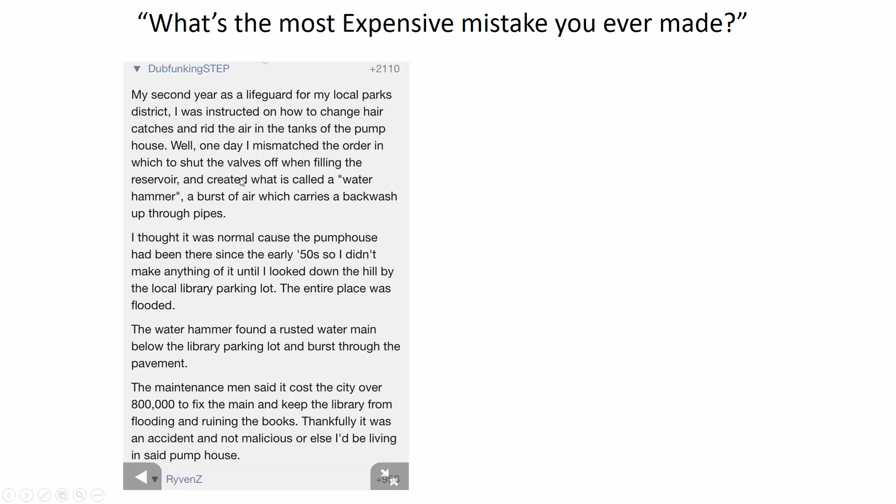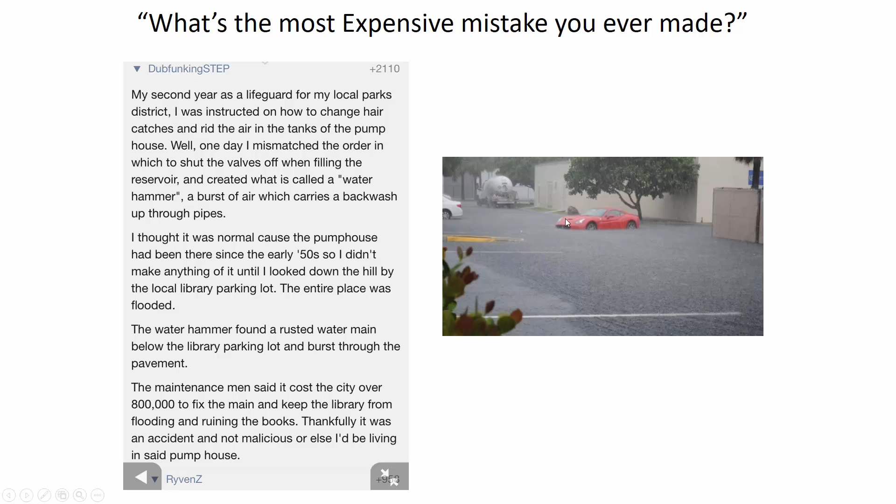$800,000 down the drain, right? $800,000 of damage. Now, I have an argument with their technical description of what water hammer is. It's not a burst of air, but it is something that can definitely find weak spots in a pipe. So we're going to be talking about what causes water hammer today, and some of the techniques we have for managing it. It's kind of just an interesting physics problem. And I don't remember why I put this picture of a Ferrari underwater — I guess to illustrate the cost of flooding.

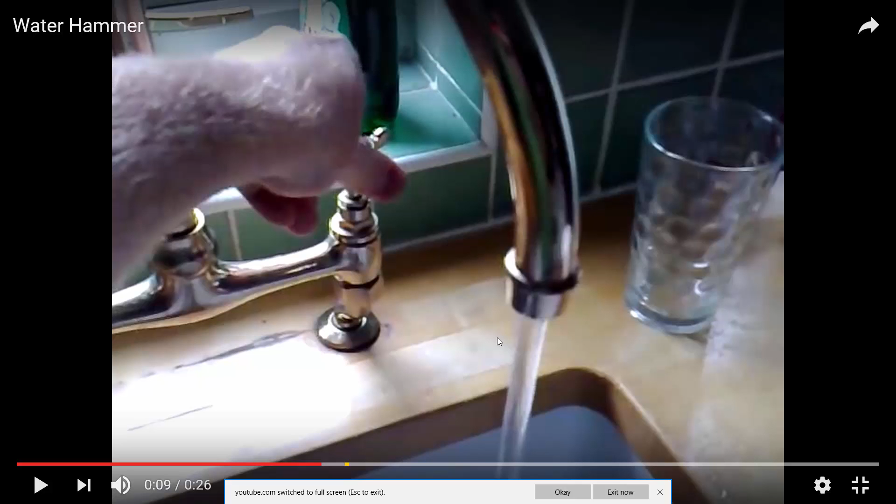So let's look at water hammer. This is a water hammer that somebody is observing at their house in the sink. It's kind of an interesting phenomenon because it affects both individual homeowners and also really complicated pipe networks as well.

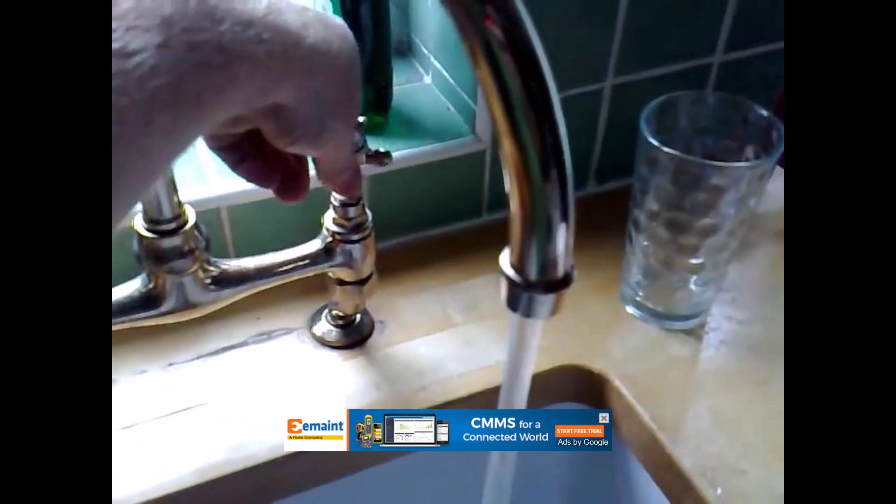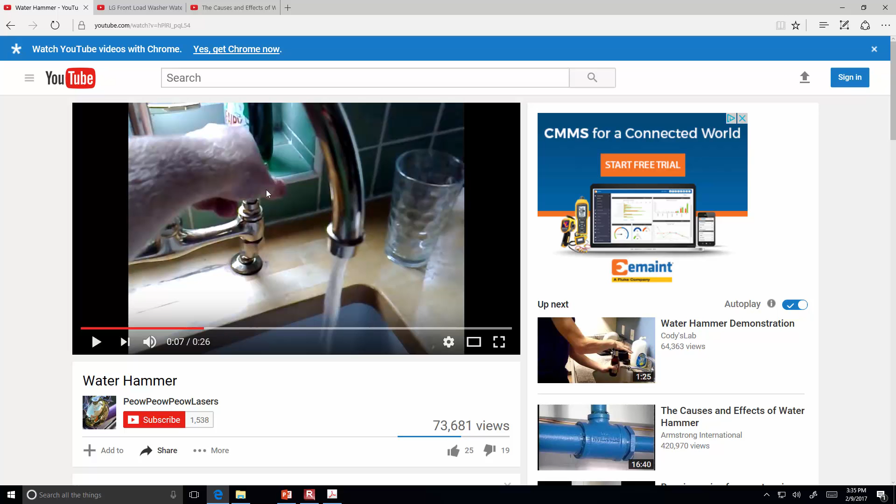Someone is adjusting the flow rate. So there aren't machine gun bullets inside the pipe somewhere. That banging back and forth is related to the time it takes for a pressure wave to travel from the valve that's being closed back to a tank. So that's one instance to illustrate water hammer.

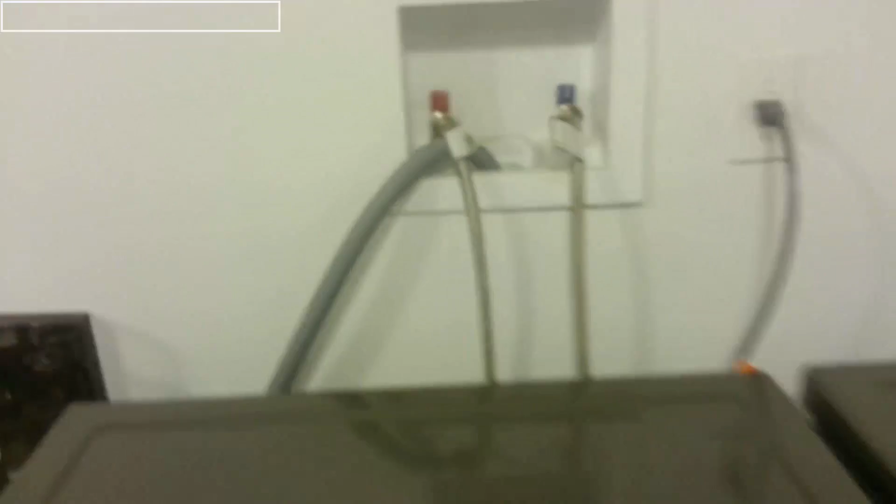Here's another. Somebody had the problem with their washing machine. You heard that noise come from the pipe. We're going to get closer, we're going to see the action over here. You see the whole pipe shake, that's from the cold water valve. And there's one solution to take care of this problem.

You actually have two. You either lower down your house water pressure, or you get yourself one of these called a mini water hammer arrestor. This is basically like a shock absorber. Having this in line would give some place for that shock wave to be absorbed so that it's not causing the surging in the cold water line that you saw.

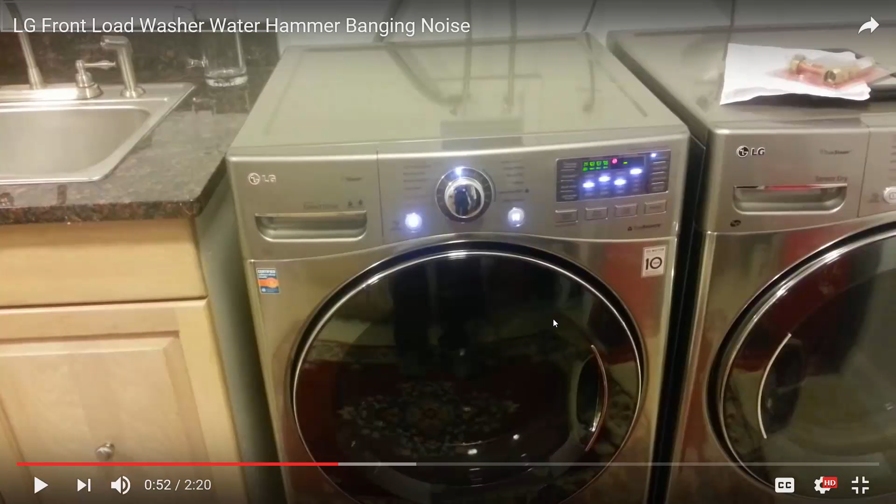The reason why that surging is happening in the pipe is that the valve inside the washing machine — it looks like an expensive washing machine, right? — is metering water into the basin in surges. It's probably an electronic switch opening and closing a valve very quickly to let just a few more drops of water come in. Machines like this are load sensing, adjusting how much water is added based on the amount of clothes it senses. It spins around for a moment and tries to calculate how much is there. It's really sophisticated, except for the fact that the valve is being instantaneously opened and closed. And that's what's causing the water hammer — the valve is being closed too quickly.

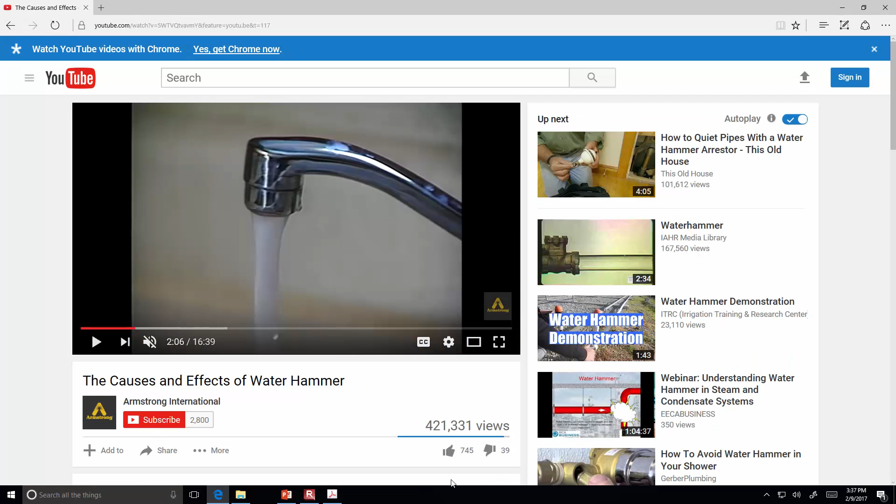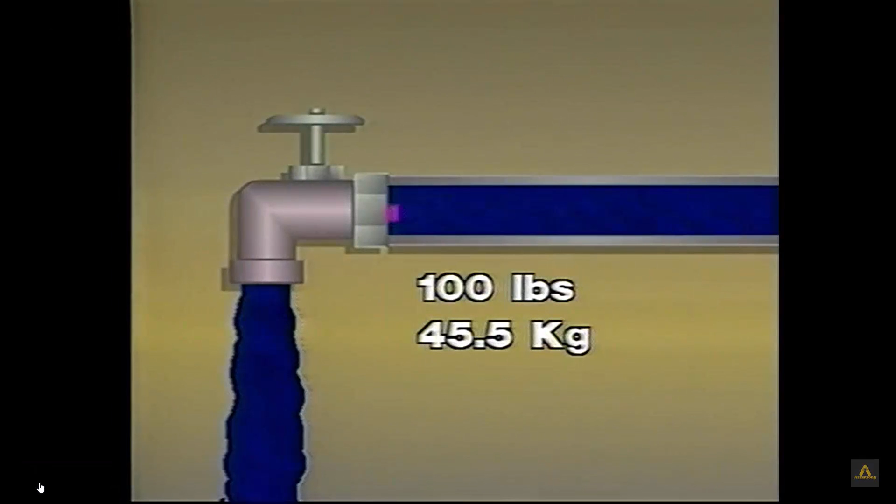This is a nice video that explains a little bit more about water hammer, so this will be the last one we watch. A column of water moves from its source at the main to the valve outlet. This could be 100 pounds of water flowing at 10 feet per second, or about 7 miles per hour.

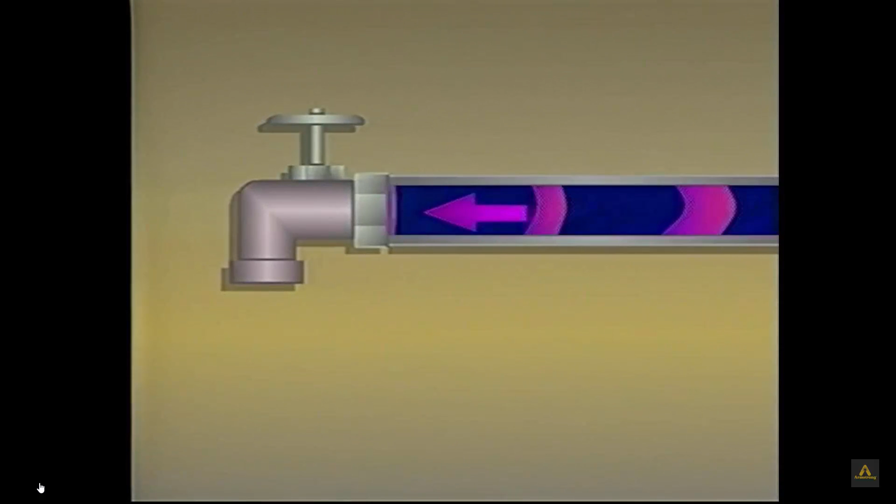Closing the valve suddenly is like trying to instantly stop a 100-pound hammer. A shock wave of about 600 psi slams into the valve and rebounds in all directions, expanding the piping and reflecting back and forth. So look at what caused that shock wave.

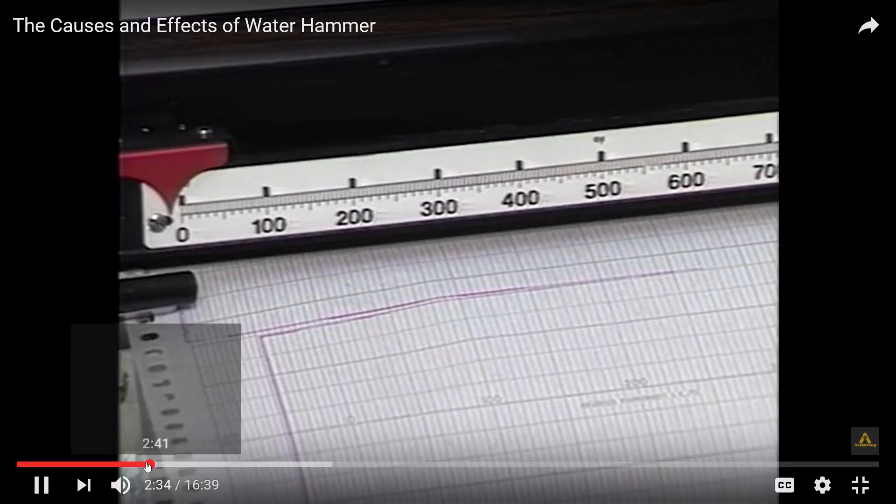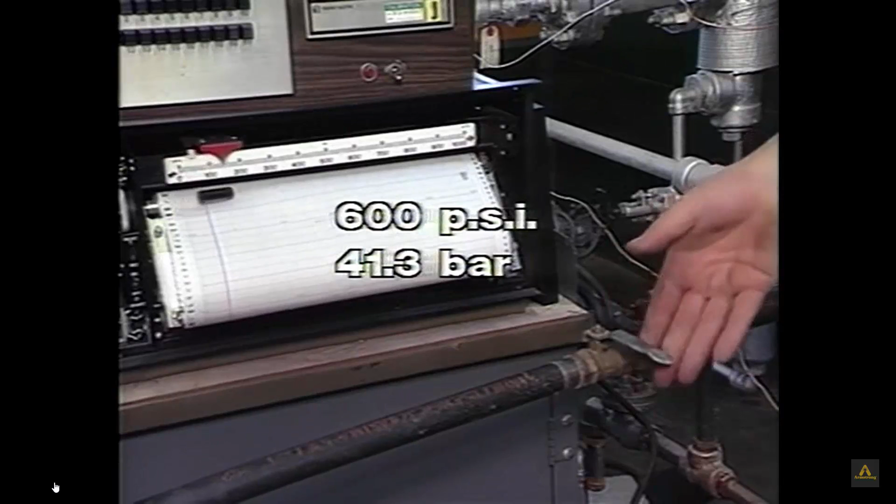Closing the valve suddenly is like trying to instantly stop a 100-pound hammer. A shock wave of about 600 psi slams into the valve and rebounds in all directions, expanding the piping and reflecting back and forth along the length of the system until its momentum is dissipated.

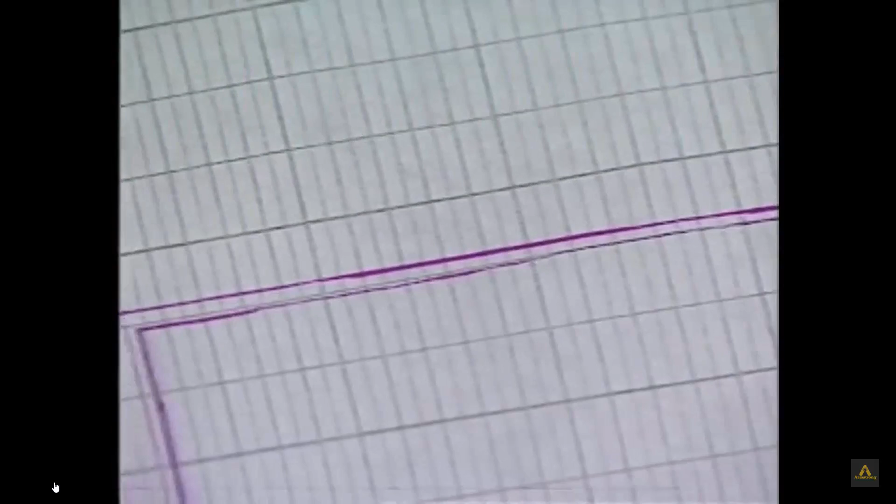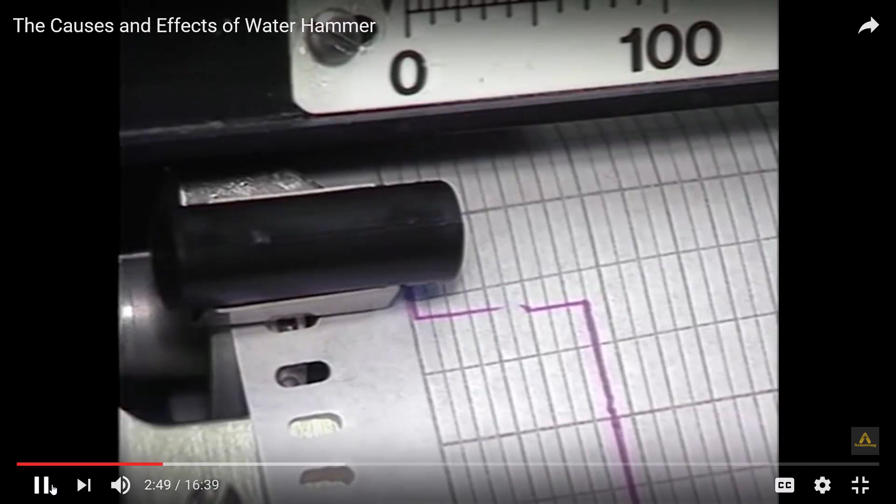By closing the valve slowly, the velocity of the water is reduced before the column is stopped. Since the momentum of the water is decreased gradually, damaging water hammer will not be produced.

All right, so it's a problem that's largely avoidable by the speed that a valve is closed.

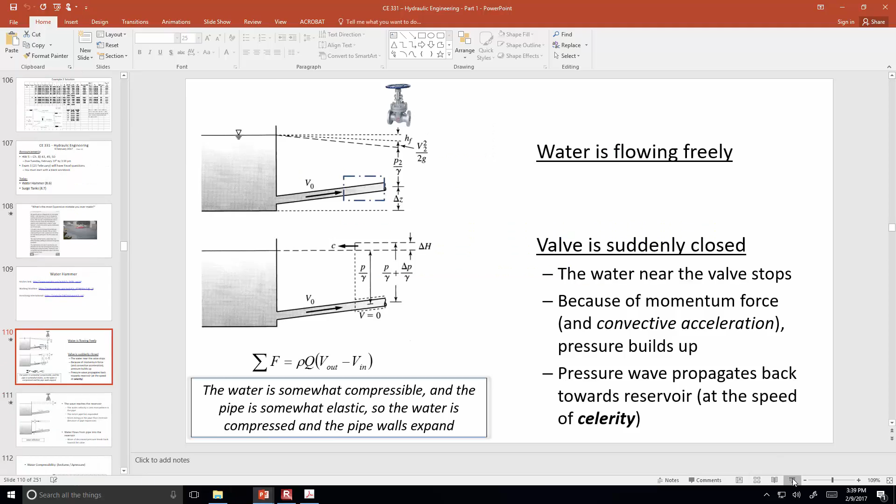Let's talk about what causes the problem in the first place. Just as an illustration, we're going to go through a series of images and talk about what happens as the water is flowing freely and then as the valve begins to close.

So what we're looking at right now is water has an initial velocity of V0, and we have an elevation datum here that all of the Z measurements are taken from. You can see that there are head losses, so the H sub F is just related to pipe friction as water is traveling through the pipe.

We have a loss of energy due to the interaction with the pipe wall. And then here is the hydraulic grade line, the lowest dashed line there, which takes into account the pressure, and the pressure is decreasing because of the change of energy.

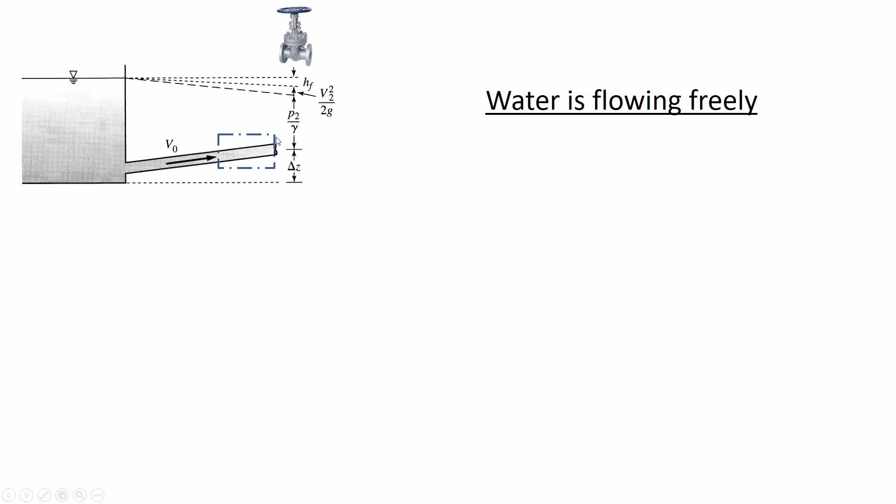So just initially we have steady state conditions. Water is flowing without any changes over time. And we could take a look at one section of the pipe and put a control surface around that, and we're interested at the flow in and the flow out through those control surfaces.

And you'll remember back to fluid mechanics when we were talking about the momentum equation, we said that we could find out what the imbalance in forces are by looking at the difference between the velocity in and the velocity out. There was the jet impact experiment, for example, where it wasn't necessarily the magnitude of the velocity, but it was the direction of the velocity that was changing by those little plastic deflector plates. Because the deflector plate was changing some component of the velocity, in our case the direction of it, that caused a force. The same thing is going to be happening here as the valve is closed.

In steady state, V in equals V out. But close to the valve, for just the briefest of moments, the velocity out of this control volume is going to be less than the velocity in.

Because water is pretty much incompressible, but it's slightly compressible, that means that there's going to be a very slight reaction time where the velocity that's coming into the control volume is faster than the velocity that's going out. And so the water is in effect piling up. There's a momentum there because of the sudden stop.

So here, now the valve has been closed, and there's a lot going on in this diagram, so let's talk about some of the different pieces of it. First of all, you can see the letter C here. What that C is representing is the speed of the shock wave that's traveling away from the valve.

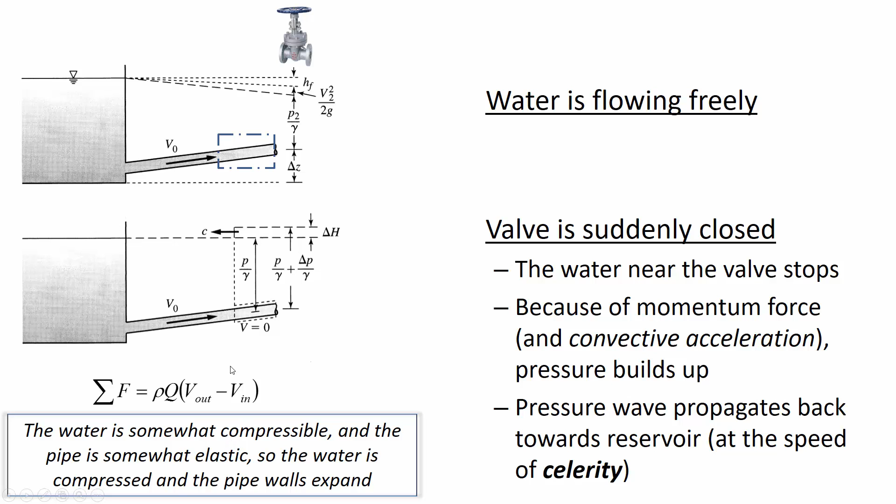The material properties that are important here are the fact that water is slightly compressible, although not very compressible, and then the pipe is also flexible - it has an elasticity so that the pipe walls can expand as that pressure wave is going through.

Now in this picture, the pressure wave, the shock wave, has made it all the way back to the tank. What this is showing with the little dotted line is that the pipe has expanded, so it's holding a lot more water than it normally would under ordinary conditions. That's why right now there's more energy inside the pipe than there is inside the tank.

Normally, if the valve was closed and it hadn't started this water hammer effect, there would be the same amount of energy in the tank as in the pipe - the line of energy would simply be horizontal, extending from the water surface. But here, there's more energy in the pipe than in the tank because of the stored energy in the pipe that expanded.

You'll also notice that the velocity is zero, because it's sort of like a pendulum swinging back and forth, and at this instant in time is when as much water that's going to go into the pipe is there. Now it's going to start rushing back towards the tank, because water flows in the direction from high energy towards low energy, and right now there's more energy in the pipe.

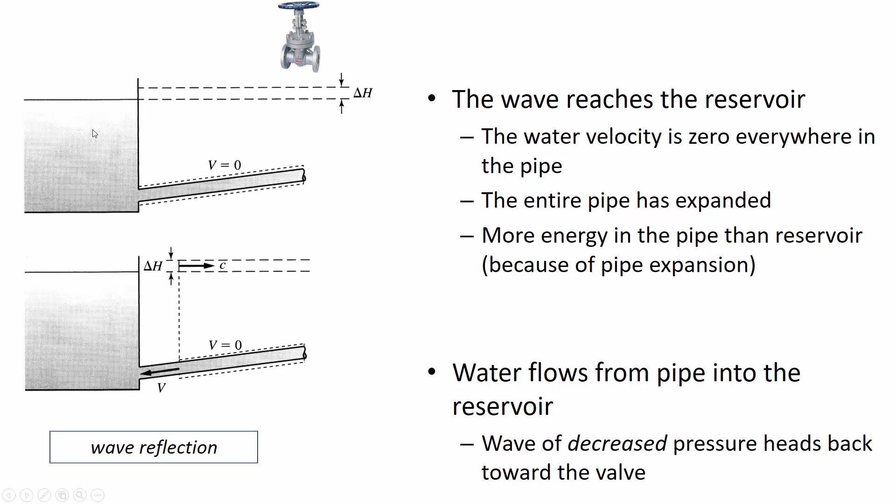There is a little bit of energy loss - each time the pipe expands and contracts, it's dissipating that pressure wave ever so slightly. But it can literally be dozens of times before the wave finally wears itself out, depending on the length of the pipe and what the pipe's made out of.

So water compressibility is at the heart of what causes the problem of water hammer. Were there any questions about this slide? Okay.

These images show different configurations of water at different pressures. The water molecule itself isn't changing the angles of how hydrogen is bound to oxygen, but there are different configurations of packing as pressure increases. That's why there is a slight compressibility of water, because you can make a little bit of extra space depending on where the water molecules are in reference to each other.

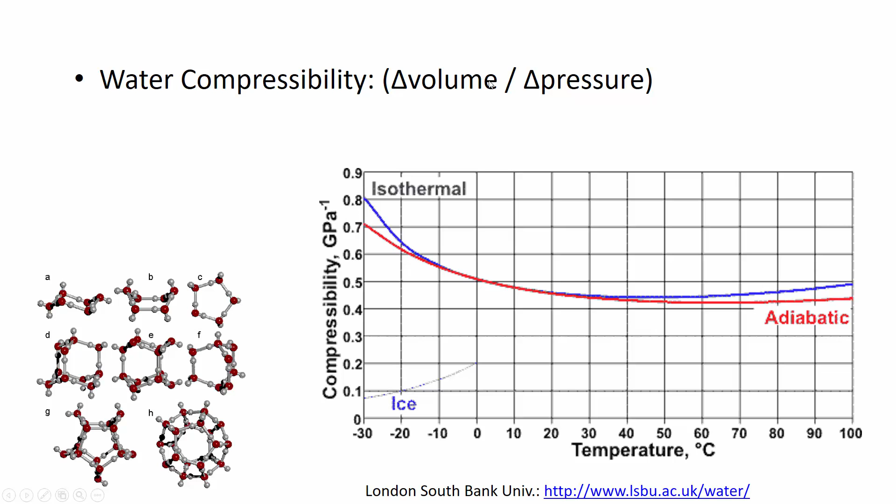Compressibility is relatively unaffected by temperature. You can see this is a fairly flat curve for the compressibility of water. When we say compressibility, we're talking about some unit change of volume relative to a change in pressure. Last semester we talked about the bulk modulus of elasticity, and compressibility is the inverse of that. The calculations we'll do use the bulk modulus, but we can think of its inverse as compressibility, how much a change in pressure causes a change in volume, a unit change in volume.

Here's the bulk modulus, along with the table in the book related to the bulk modulus of water at different temperatures and for different pressures.

The bulk modulus, E sub V, relates to specific volume, the volume occupied by a unit of mass. One kilogram of water, for example, occupies one liter of space. With the bulk modulus of elasticity we're asking how much change in volume occurs for a certain applied pressure. The units of bulk modulus are simply units of pressure, newtons per meter squared, or in traditional units, pounds per square inch, because the units of specific volume and change in specific volume, cubic meters or liters, cancel each other out.

What's that? Oh, right, yeah. Great question. So what if you're right on the edge? I guess what I'd do is average the two. Are there other questions?

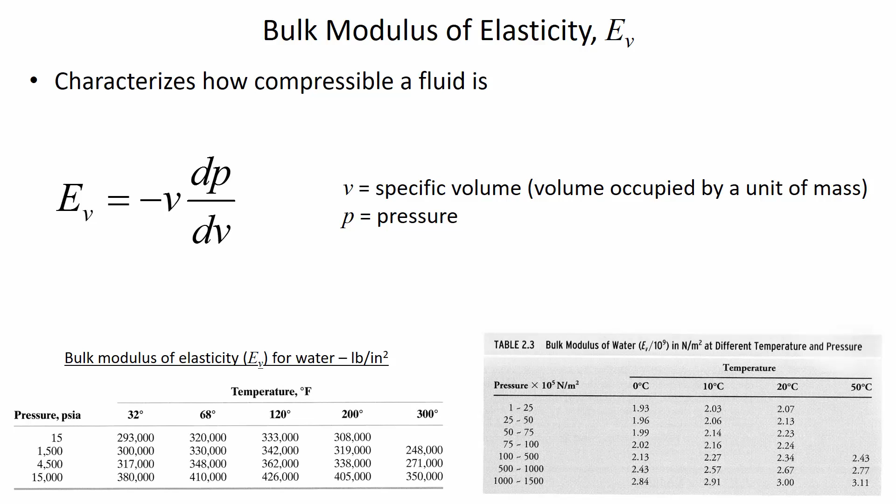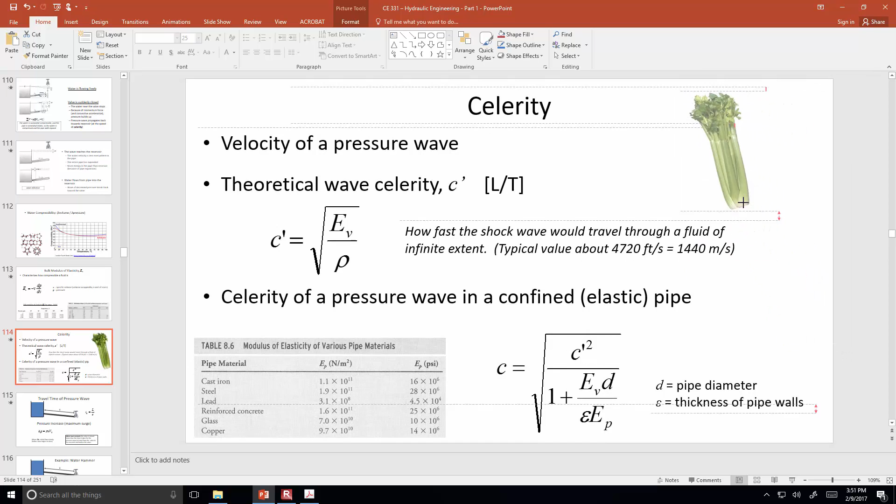All right, so celerity, I put this up there just to make things extra confusing. It's celery. Yeah, well, calling into question my vegetables here. It's not asparagus. Okay, it was pretty small though. In the notes maybe it's black and white.

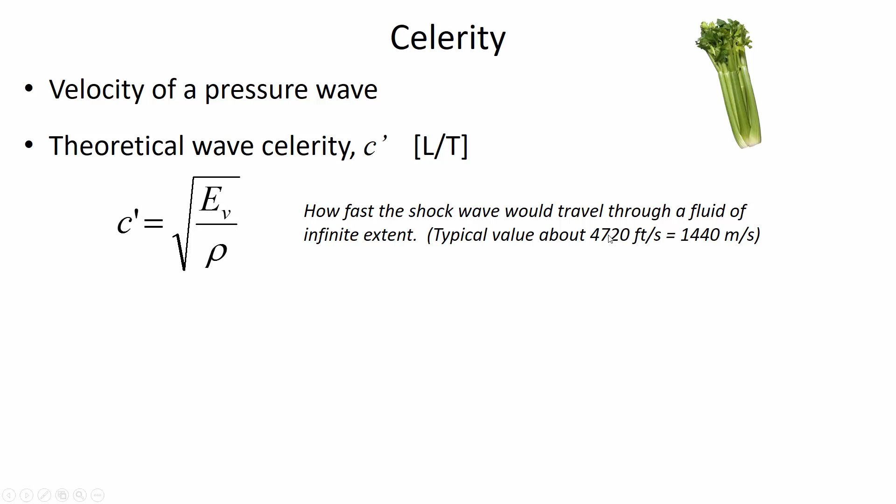Celerity is the velocity of a pressure wave. In theory, if we measured it in the open ocean where the pressure wave could travel unconfined and unreflected by a boundary wall, it would travel at a speed related to the bulk modulus of the fluid and the density of the fluid. Generally, a typical theoretical wave celerity is 4720 feet per second, more than a kilometer per second, that's how quickly pressure waves move through water.

However, in a confined space, like in a pipe, the velocity of the pressure wave is different, affected by the material properties of the pipe itself. E sub V is the bulk modulus of the water, but E sub P is the modulus of elasticity of the pipe. We also have to know the thickness of the pipe relative to its diameter. This accounts for the pipe flexing, being somewhat elastic as the pressure wave moves through it. In the example we'll work today, we'll find that this slows down the shock wave compared to the speed the pressure wave experiences in an open situation. The confinement of the pipe slows it down, so C will be lower than C prime.

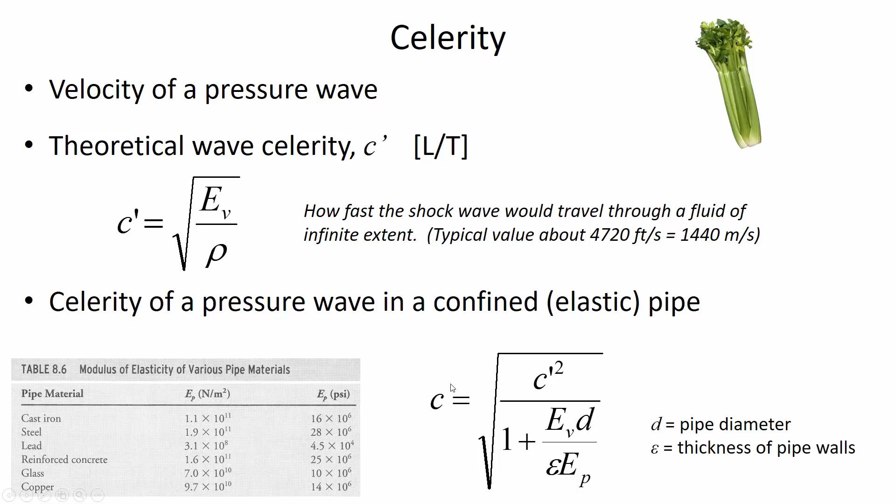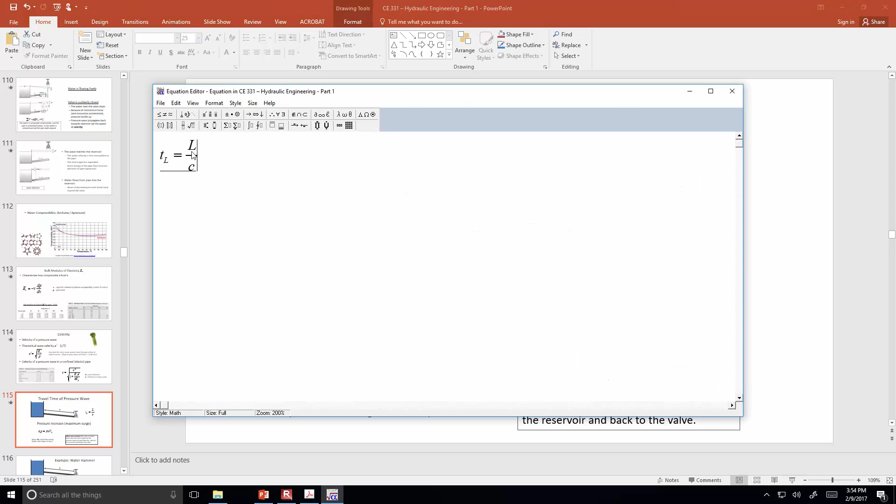The key to avoiding the issue is closing the pipe slowly. We want to make sure we're closing it slow enough that any shock wave has the opportunity to travel to the reservoir and back. We want to close the valve slower than that travel time. In this formula, the L discussed should actually be 2L, that's the travel time we need to be concerned with. If you have that printed in your notes, change it to 2L, because L is the pipe length, but the critical time we have to be careful about is the round trip distance, since the pressure wave travels from the valve to the tank and back to the valve again.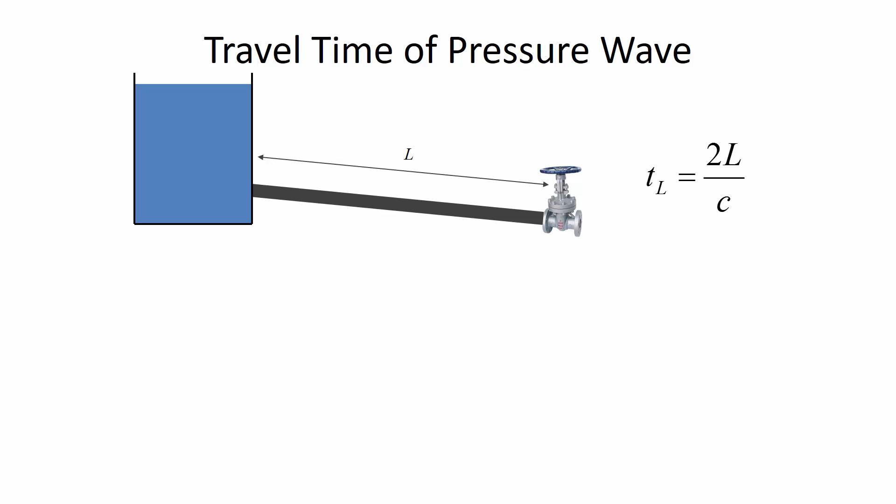If the valve is only partly closed by the time it makes that round trip, then the accumulation of pressure doesn't occur. In the video we were watching, where they had a printer showing the increase in pressure, I'd be interested to know their setup, how long the pipe was, because they had a reservoir somewhere at the end of it. When he closed it slowly, the pressure didn't increase in the pipe because the water's momentum was slowed gradually as the valve was partially open.

We can calculate the magnitude of how much pressure is increasing, the maximum increase. If you close the valve faster than this time, T sub L, then this is the pressure that you'll get.

It's related to the initial velocity, the celerity, and the density of the fluid. So the initial flow velocity is really the only thing we have control over. We can't change the density of the fluid, and we can't change the speed at which the pressure wave is traveling—not in any real sense. We're not going to adjust a pipe diameter to try to control that. But we can ensure the velocity is low in the pipe, which helps protect against a high surge in pressure, or we can have an automated system for closing the valve at a speed less than that travel time.

So for you to get your hands dirty with these equations, I wanted to give you this example. We have a pipe that's 2,000 feet long, made out of steel, 4-inch diameter. So the 4-inch inner diameter pipe has a wall thickness of 0.2 inches. It's carrying a flow rate of 0.6 cubic feet per second. Here are the material properties of the pipe, and here are the fluid properties of the water.

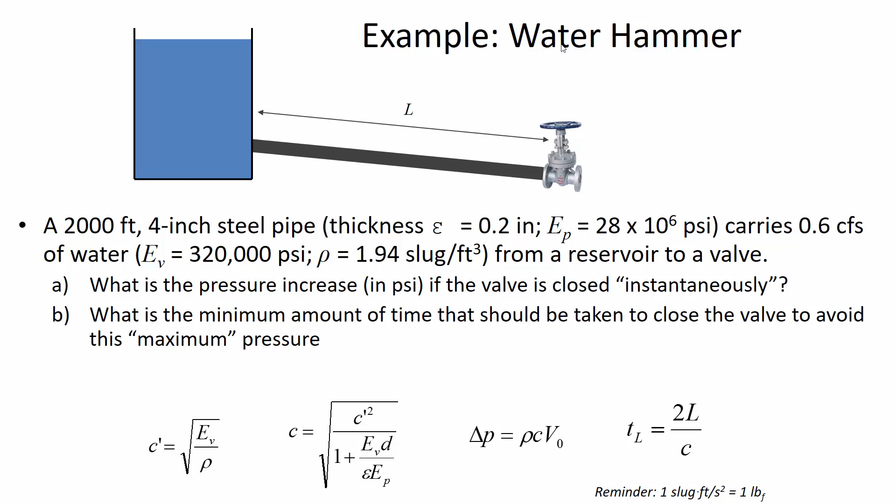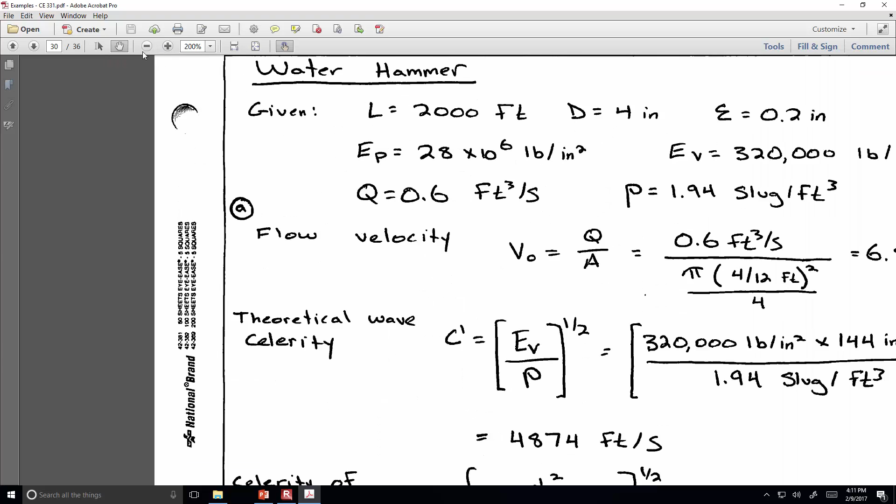All right, so I found the velocity first just to have it available when we needed it, 6.875 feet per second. Then we're going to calculate the theoretical wave celerity, which is the speed of a shock wave in the open water, and that should be 4874 feet per second for the conditions described. Of course, these fluid properties are based on a certain temperature of the water, so it could be variable depending on what temperature the water's at, but not by a lot.

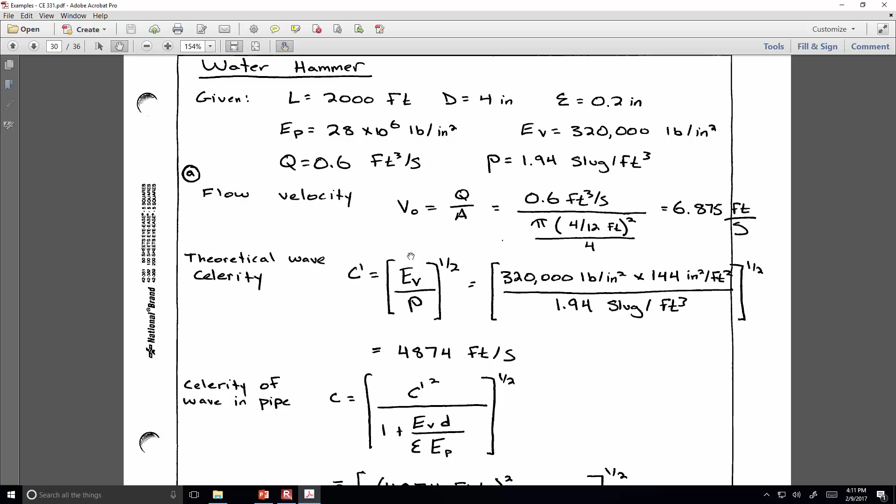Things change more based on the conditions in the pipe. In our case, we were working with a 4-inch pipe that has a 0.2-inch thickness. I've done this example in the past where I converted PSI into pounds per square foot, and converted the inches to feet, and this PSI to pounds per square foot. But then it occurred to me that's not really necessary since the units cancel out. We have a length unit in the numerator due to the diameter, and a length unit due to the pipe thickness, so it can be either in feet or inches and it'll cancel out. The same is true for the bulk modulus—those units cancel out too, so it can be PSI or PSF, either one.

What we end up with is the new celerity, and so the pressure change we could see up to 58,000 pounds per square foot, which is about 407 psi. Anybody else get the same number for that? Okay.

So that would definitely be enough to explode a water heater.

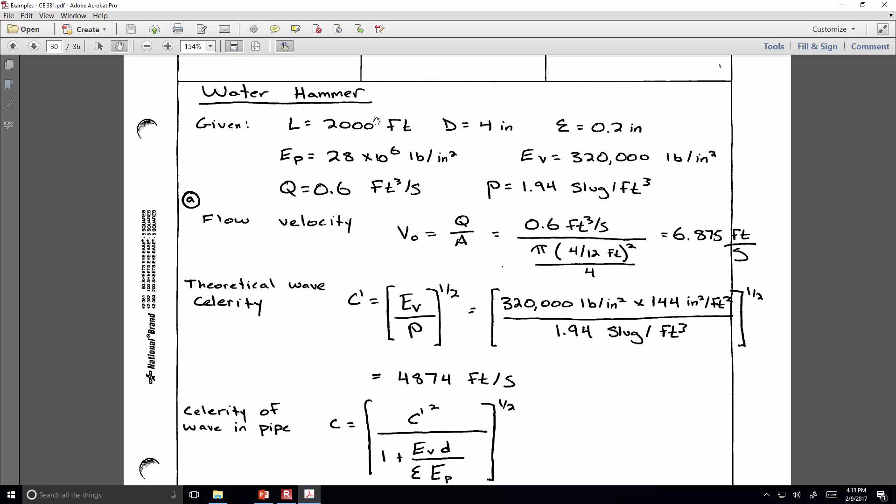Now, these are pretty unusual circumstances, though. We're talking about a 4,000 foot travel distance, so the physical length of the pipe in this one is 2,000 feet. That's about a third of a mile. It would be unusual to have an uninterrupted segment of pipe quite that long.

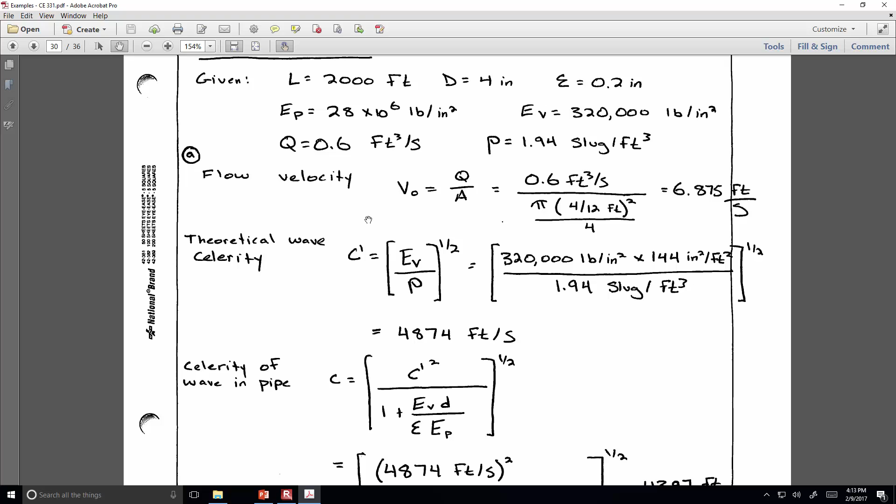But if you did have a section of pipe that long, it would be especially important to close the valve slowly. The risk factor for having a big change in pressure is partly related to the velocity in the pipe, but also the travel time. If we calculate the minimum close time, in this case it's about a second, so you have to be more cautious about the speed you close the valve for a longer run of pipe, because that longer run gives more time for the shock wave to get all the way back to the reservoir before it starts heading towards the valve again.

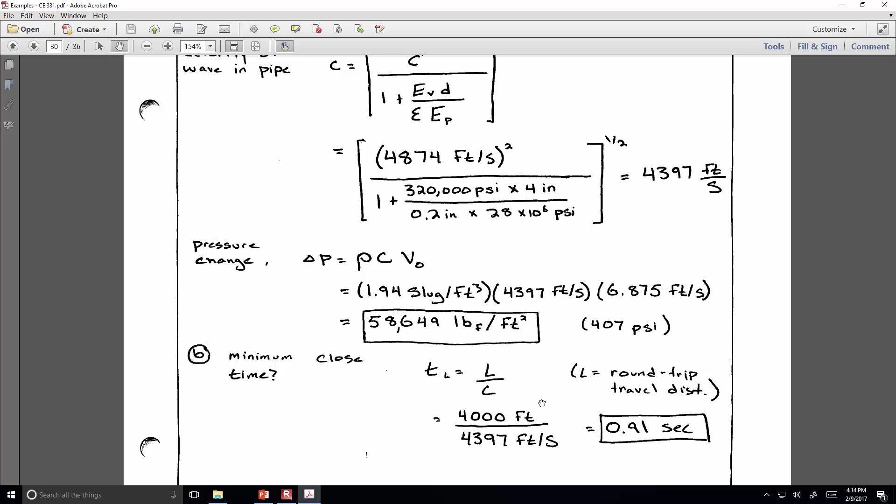So short segments of pipe can be closed really quickly without the risk of water hammer. It's the long sections of pipe that are the issue, and maybe that's why, in addition to the shock absorbing fittings, we don't usually have sections of pipe quite this long. That's why it becomes less of an issue how quickly the valve is closed.

Surge tanks are one of the ways to relieve that shock wave and give some place for the water to go so that the pipe doesn't have to expand. So it's kind of preventing the water hammer from ever occurring.

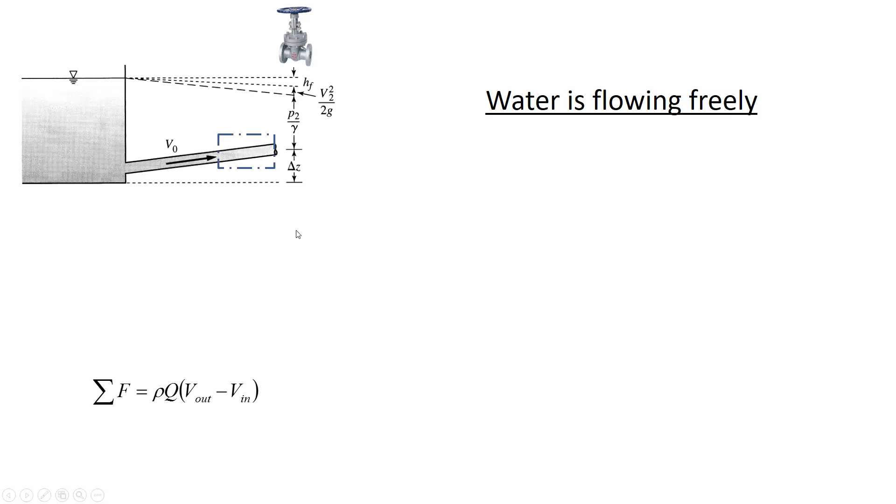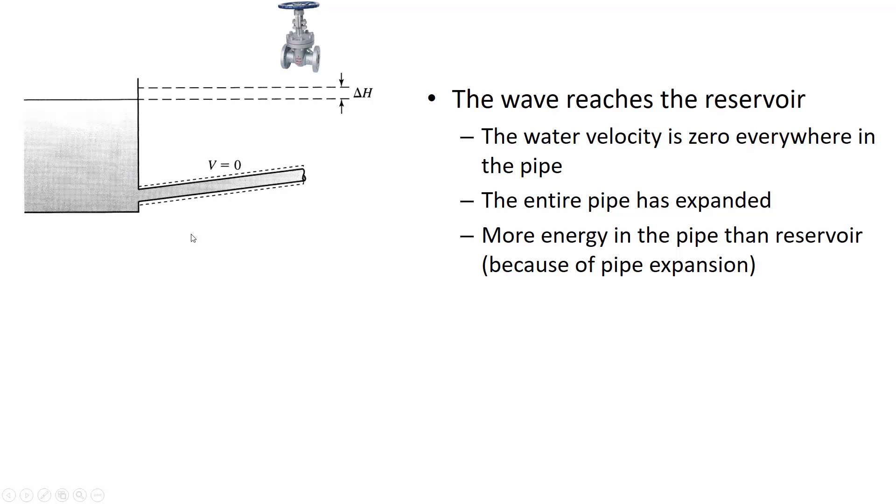Back in that case, those dashed lines were representing the fact that some additional water had gone into the pipe as the pipe expanded. So rather than allowing the pipe to get so much embodied energy and then later contract, what the surge tank does is just give it an alternate location for the water to go into.

How high the water surge is going to be depends on the length of the pipe, the cross-sectional area of the pipe, and then the diameter of the surge tank, which affects the cross-sectional area of the surge tank. If you have a very large diameter surge tank, the water level isn't going to go up or down very much during a surge. But if it's a relatively narrow surge tank, it's going to have a lot more height to it for the water to fill up that volume.

So let's take the same case we were just solving, where the physical length of the pipe is 2,000 feet, 4-inch inner diameter, and the flow velocity that we know. How big around, what would the diameter need to be for a surge tank if we only wanted the water depth to increase by a maximum of 1 foot during the surge? In other words, solve for the diameter of the tank, which is going to go into the cross-section of the tank, assuming an S max of 1 foot.

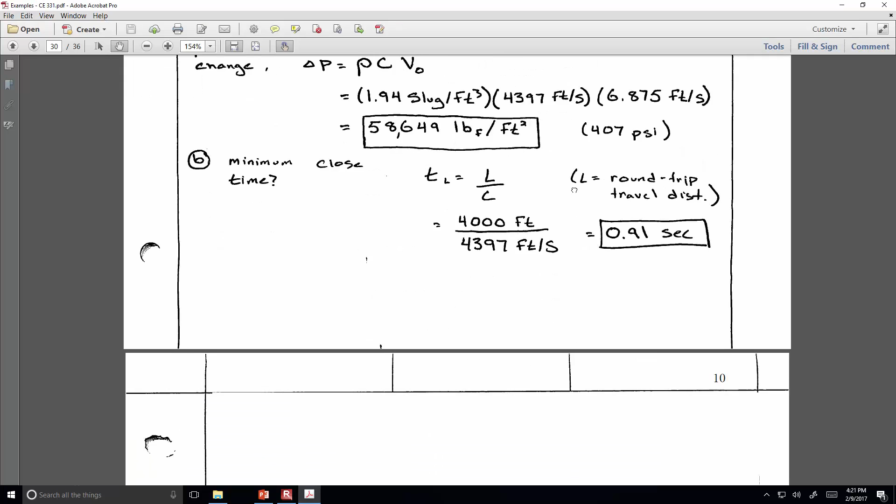So I was glad to hear your skepticism. People are saying 18 feet, that seems like a lot. That's pretty big, so that means you're thinking in terms of reasonableness. It is that big, but you're evaluating things against what seems normal. That's just a 4-inch diameter pipe, right? But think about the volume of water in a 4-inch diameter pipe over 2,000 feet. It's a lot of extra water that's going to be in there.

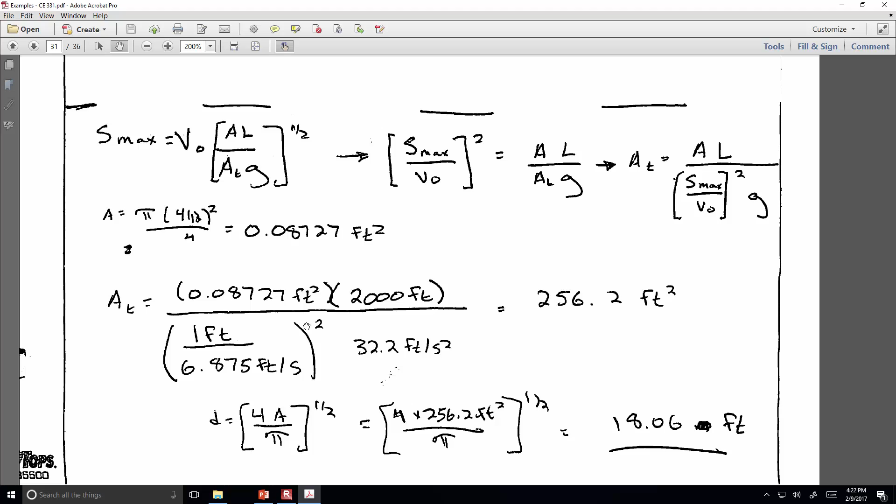So if we didn't want to make a tank that big, then of course we just have to make it taller. But either way, there's a certain volume of water that has to be contained during that surge, and if we provide a place for the water to go, it relieves the pipe of the necessity of expanding during the surge. Yes?

Like in a household plumbing application, how do you determine the length of the pipe from where the tap is to what's considered the reservoir? What is the reservoir in a household plumbing application?

I've wondered the same thing, because where I live we have a lot of boil water advisories, probably six a year, and they can never tell us exactly which people need to boil water and which can't. I think their uncertainty stems from the fact that there are a lot of tanks all over the place actually pressurizing the network. It's not pressurized just from pumps that are left on all the time.

So I think the nearest reservoir that's actually pressurizing the water in your house may be one option. But the water company also has pump stations, and it's possible they could have an enclosed space, pressurized, where they have a place for the water to go. Out where I live in Ona, there's a pretty big building by the road with a couple of pumps in it, and it makes me wonder if there's another one of these surge tanks in there as well.

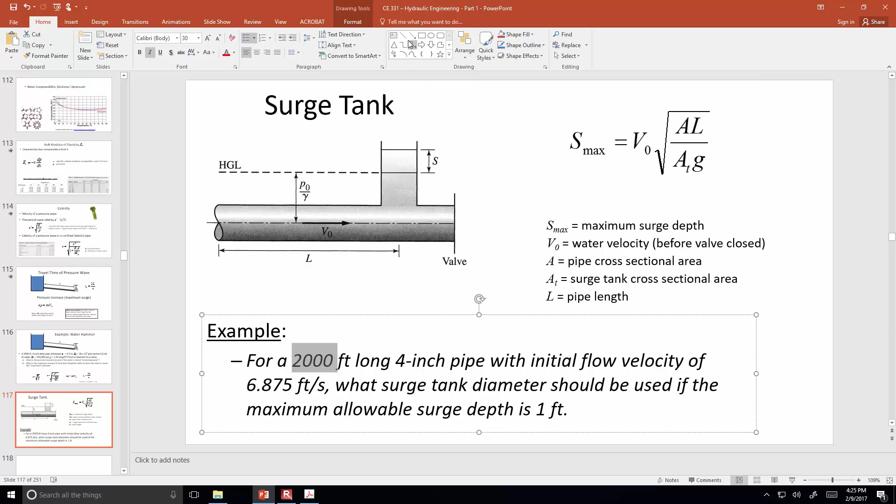All right, so for the homework that you've got due, you want to look at that one? Yeah, that's from a couple years ago. It certainly couldn't have anything to do with what you're going to see. Right, all you got to do is hack into my account, figure out my password, and it's all yours. Keys to the kingdom. No, it's not that, for sure.

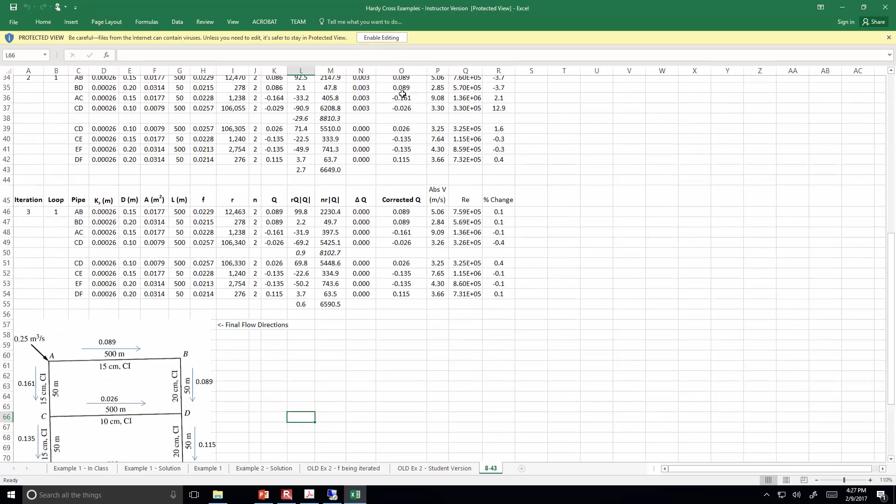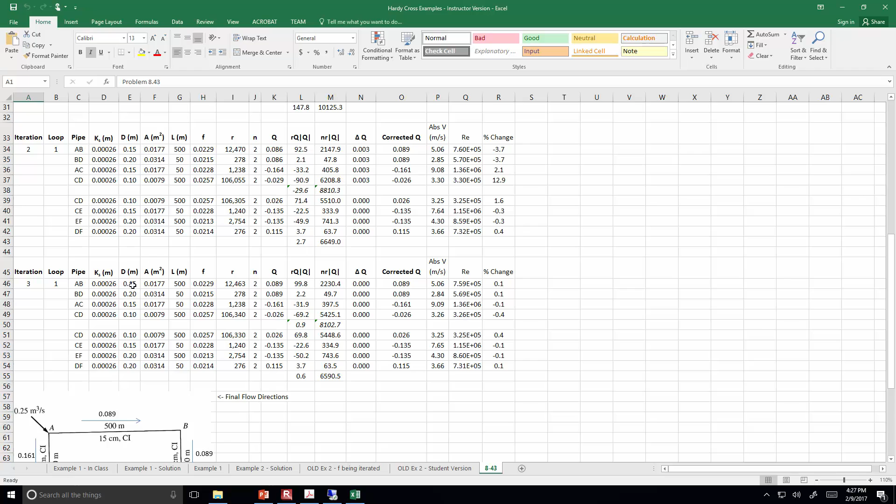Okay, so here's problem 43. That's the one you're doing, right? So you start with some initial guesses. I got mine to converge pretty nicely after three iterations, and that's why I'm so surprised. Five, you say? You were saying fifteen earlier. You had a bad initial guess?

Well, if you want to write down these corrected Qs, I don't mind you knowing this in advance. You still have to set everything up and solve it, but at least it gives you an idea of what you're aiming for, for it to be converged.

Use a phone to take it. Just mine are off, like hundredths or thousandths. So mine says 0.089, what does yours say? Like 0.0876. And so if we rounded off, that would be 0.088, right? Pretty close. Let's see what this is saying, because it's not exactly 0.089.

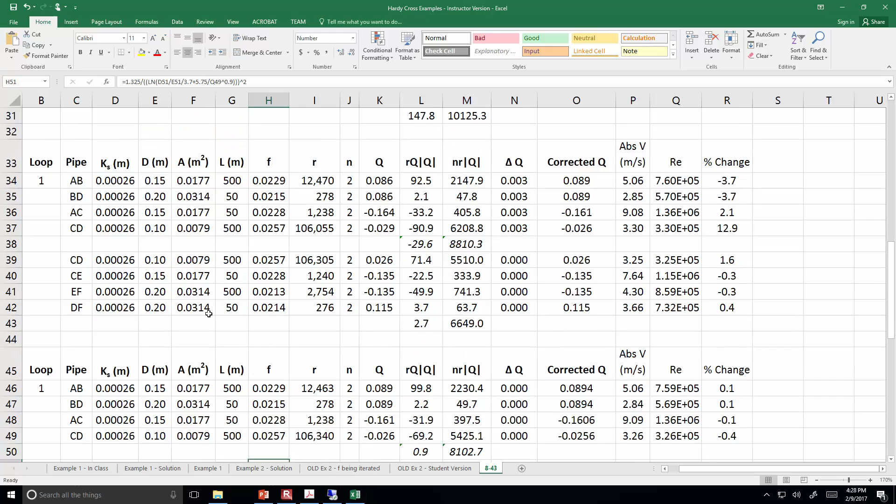All right, so there you have it, if you want to use that as a reference. Question? Oh, really? Oh, galvanized iron, that may be it. Thanks for fixing my solution.

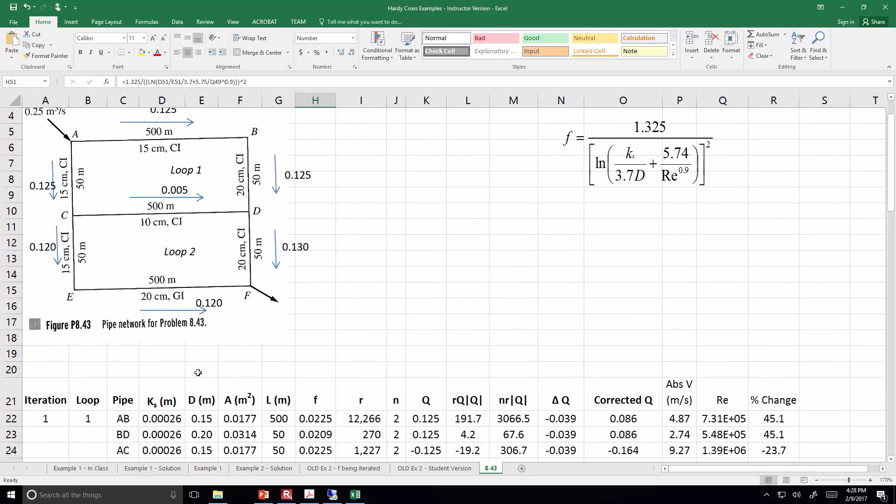So what KS value do we use for that one? That could be the source of the difference. So let me copy that down to the rest of the iterations.

Oh, I'm definitely slacking, guys. I never said I'm perfect.

All right, here we go. Is that closer to your solution then, right? Okay, great.